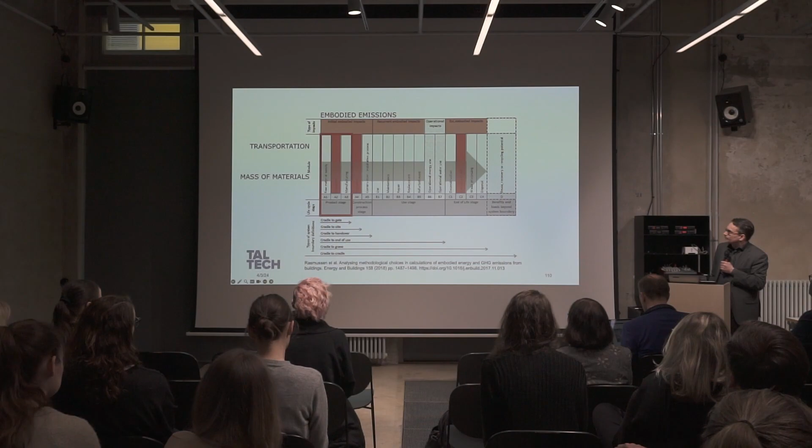So what can it say and what can it tell us? This is often asked in education, by our students, and in training sessions. To some extent, the carbon footprint of a building can tell us about site conditions. As we heard from Alvin's presentation, if the soil needs high foundation, if it needs stabilization, this is a difficult place to build, you will get a high carbon footprint.

It can reflect the use of local materials and low-tech materials, if you like. This is not excluded. We have two layers here: the LCA method described by the graph, and the layer of regulatory default values. With the good aim, the regulatory layer aims at having comparable results, but sometimes it also simplifies things and leaves certain things out. For example, the Finnish discussion was a lot about what to do with underground spaces. We know there's concrete, there might be a lot of construction underground. But if we take them in, two buildings become very difficult to compare, because one might have a lot of stories underground and another one doesn't. This is a regulatory layer—we want to compare, so we have to exclude something to be able to compare. But if you just want to know, you of course include everything for the sake of knowing, and then you can improve your processes and way of working.

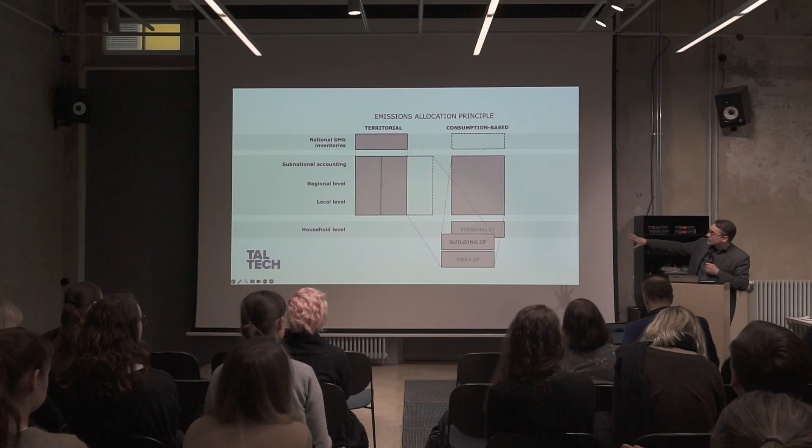This is simply because globally the methods are still developing, and there is no consensus on how to estimate emissions for cities. There are two pathways we are looking into in our research team: consumption-based and territorial. Now the building method is actually leaning more towards the consumption-based method, and this causes some methodological difficulties that I don't have time to discuss right now.

The difference between the methods is that the carbon footprint of a building sees the process from raw material extraction until end of life as a linear process in time, whereas city inventories look at one year—what just happened—and try to quantify that. That's why they are not directly comparable.

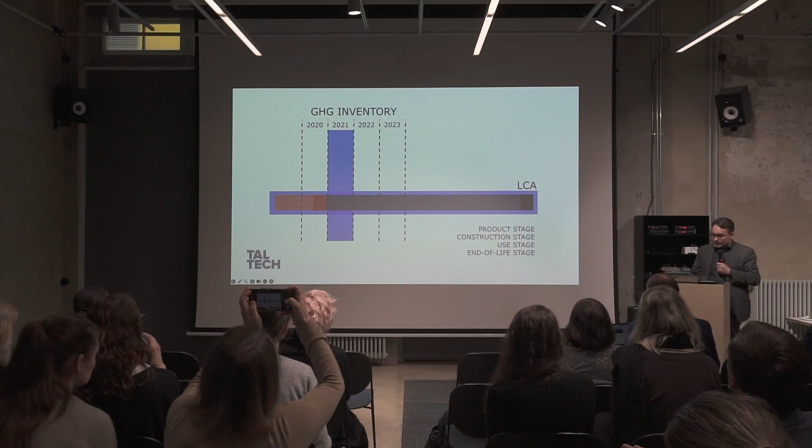A slice of the building's life is included in city and national inventories like this, usually just the energy. And now the question: why are we using 50 years as a lifespan in this building carbon footprint calculation? Isn't that too little?

I'm often asked, buildings should last much longer—look at the buildings in the Old Town. Why are you saying it has to be 50 years? Well, the building won't collapse after 50 years because of our calculation method.

This is the regulatory layer, because we want to compare. The point of view for this calculation is the moment when we know something about the materials, but we don't know how long this building will last. Maybe there will be a new master plan that says this has to be demolished after 5 years. We don't know—it's speculative.

Future is speculative, but to be able to compare and set some limit values, we just assume, let's say, 50 years. Why not more? It would be nice to have buildings that last 500 years. Because then the results would be entirely dominated by the energy use, and the materials would be just a tiny slice in the result that would make no difference at all.

So with the 50-year lifespan, we have a rather good balance between materials and energy use. Specifically in Estonia, this is dominated by energy use. If you go to Sweden, the results are totally different. In Iceland or Norway, the energy share is very small, mainly because the grid electricity is so low carbon there.

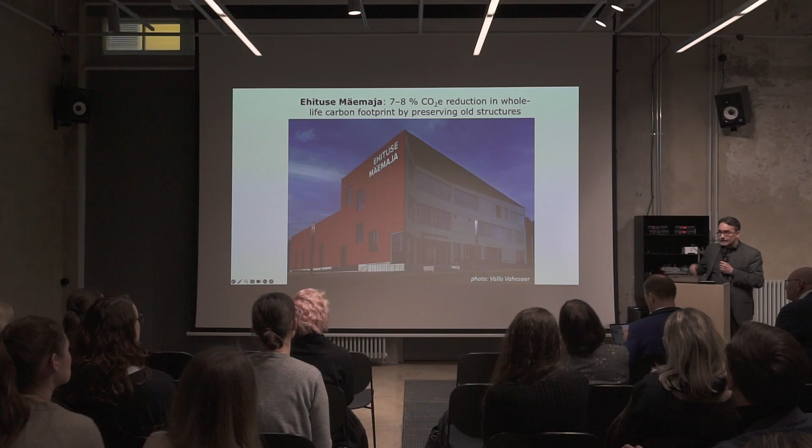Then there's the reuse of materials. Reused materials come in without emissions, and there's a real benefit. This is one example we calculated for a project with Kadrian. This building had a test hall, foundation, and underground floor that was kept. We estimated that 7 to 8%, using the old emission factors, was saved because we were able to use the old structures.

I think our professional activity will be more and more characterized by this kind of work. For example, at Aalto University, the main design studio for second year students was changed a couple of years ago - now it's an adaptive reuse studio, whereas it used to be a building technology studio. That reflects the change in our work. We are more and more reprogramming buildings, reusing materials, trying to increase the value of material that was once considered waste and worthless.

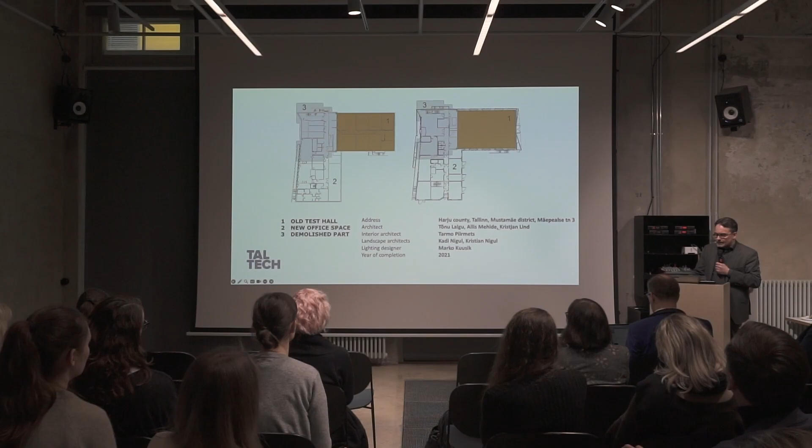What else can we do with low carbon architecture than show good results in carbon footprint? If I tell you that this is just one tool and it cannot do everything, what are the other tools that we have in architecture?

The impacts on city scale won't show, but they are many. The economic use of buildings - we can encourage it, we can make it easier. We can invest in adaptability, as Alvin was referring to. Because over a long period of time, if a building is strictly designed for one purpose, and needs keep changing, that means more renovations, more material investments. In the worst case, it means the building will be demolished.

So if you look at future architecture, maybe buildings will look less like specific buildings for one use. They become more generic in a way. They can still have strong identity and character in architecture, but they aren't bound to one use - rather they're flexible, from offices to apartments and back, and they serve a longer time.

Low carbon lifestyle is something that doesn't show in carbon footprint metrics, but it's something we as architects can encourage. If you think about urban farming, there's no way to make it visible in carbon footprint, but that doesn't mean it's a bad thing or that you should ignore it.

One important thing that doesn't show in carbon footprint is how many square meters we have per person. Imagine a very rich person building himself a house of 1,000 square meters and living there happily. Then we have a 1,000 square meter townhouse that houses 20 families. If the unit is CO2 kilograms per square meter, we cannot see the difference. But of course this makes all the difference globally.

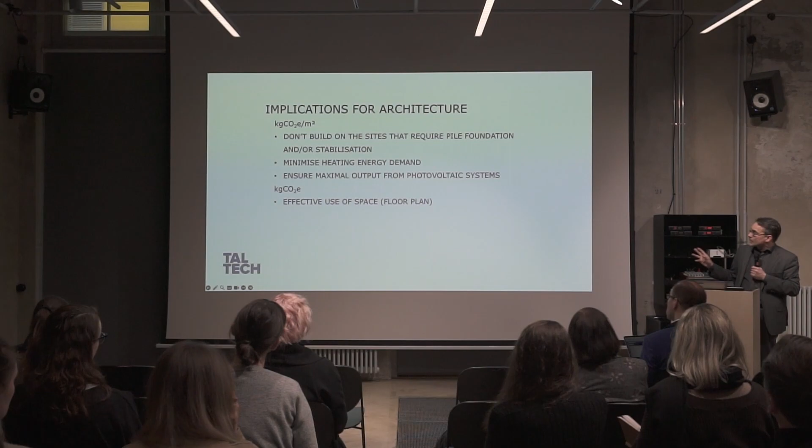Then if you look at the total emissions, these were per square meter emissions. The effective use of space is important for us, and I will come back to this later, and skip the next one, and go to the question of material choice.

There was an interesting debate here about CLT versus concrete. I believe totally that the results we have in our database are correct, and the embodied emissions are not like God-given things. They are the process of the industry.

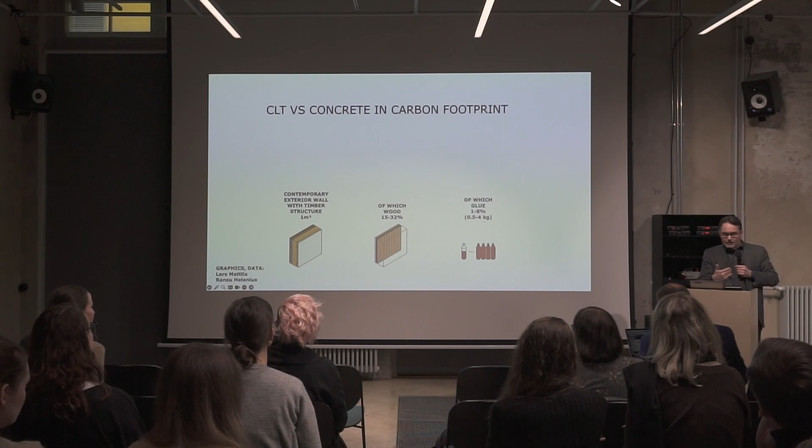And now it just happens that the process of the Estonian wood industry is not very good. If you burn diesel to dry the timber, results are really bad.

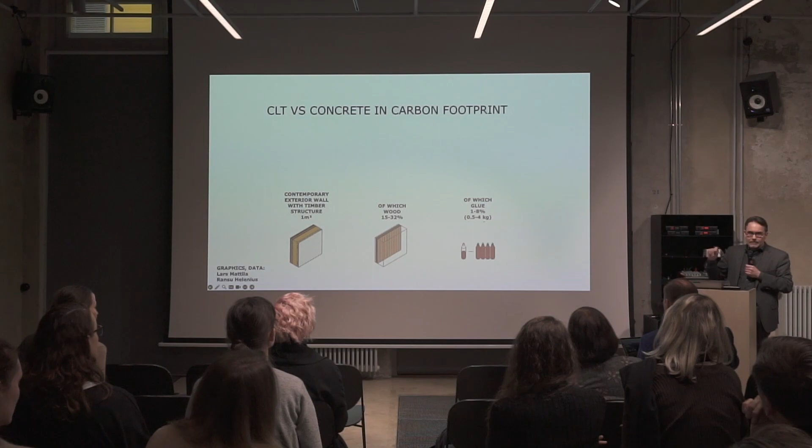But also, another finding by Lars Mattila and Ransu Helenius is that actually a rather small percentage of our wooden buildings are of wood. The share of timber is actually very small. So if you expect that using timber makes a radical reduction, actually the share of timber is rather small. And how could it make a really radical impact if the percentage of timber in timber houses is so small?

How could we respond to this? We could design houses that are more of wood, less of gypsum, less of glue, more of timber.

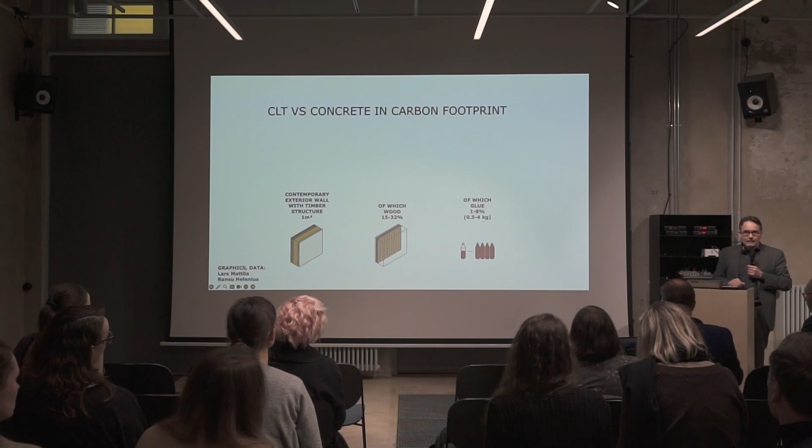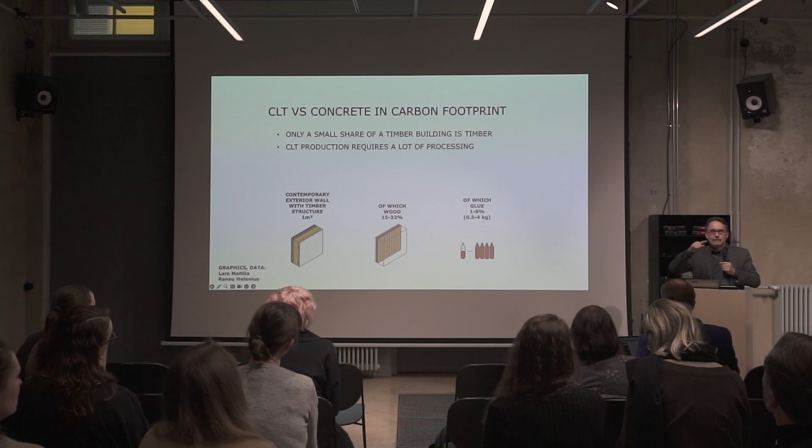And CLT production especially requires a lot of processing. We first split the trunk into small pieces, then we glue it back again on the panels. And then an architect comes and says we need big holes here because I like big windows. That means a lot of waste.

A good recipe for a CLT building would be that you go to the factory, see what size they produce, and use it entirely in your building. And when you have windows, you have full wall windows, and maybe some light frames around it if you put thermal insulation. Then you don't waste the material, you understand the process behind it, and a certain kind of CLT architecture starts to evolve that uses this understanding of how the material was created.

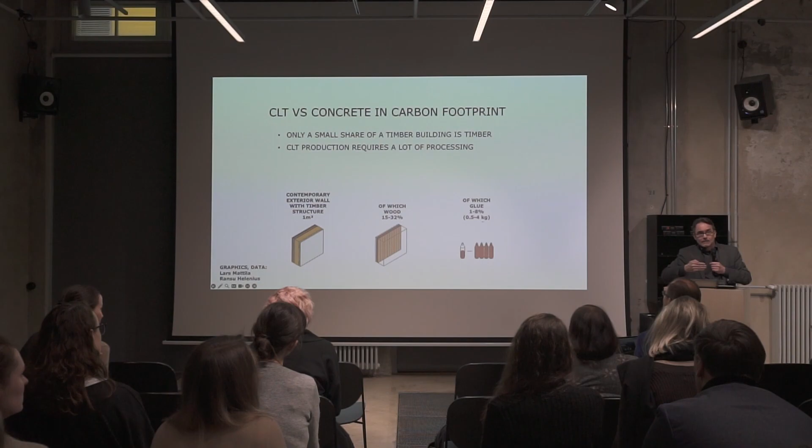Okay, so here we come to the next point. What are the expected impacts? Firstly, it's good to know, because this knowledge is different in all these countries. So the weighting of these components is different in Norway, Denmark, Sweden, and Finland. It's good to know what it is here.

Then, of course, we can prioritize low carbon construction materials as architects, but I believe the main impact will actually happen when the industry notices that, wait a minute, we would like to export to Nordic countries, and our numbers look like this. Who will buy our timber if we have such poor values? Will we lose the tendering processes if we come in with this kind of EPD? Probably yes, so they will improve the process, and that is exactly what we would like to have.

What kind of buildings then would we not like to see? This is a question that the Finnish Ministry of the Environment didn't like at all. I was asking, what are the buildings that you would like to cut off with the regulation? They were saying, we don't want to cut anything off, we just want to steer. Of course you cut something off. What is the regulation that doesn't cut something off? What do you need it for?

Of course there has to be some compositions that you don't want to see. They are the worst ones. And I think we have to understand exactly what these are, because we want to steer the development so that we know exactly what we don't want to have anymore.

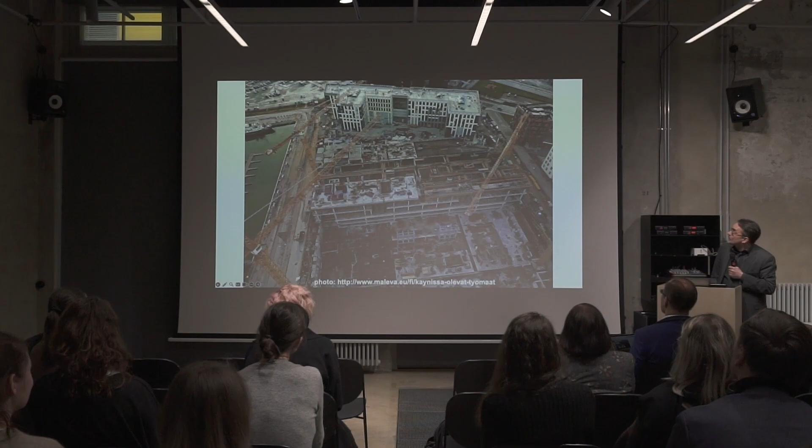And sorry to say, I've been using this image in many lectures to show what we don't want to have. Here, you know where we are. We are building of concrete, aluminium, steel, and glass—materials that are not renewable. We have buildings that are almost glass covered, exposing them to rather high heating energy demand. And with all these choices, we are accelerating climate change that will lead to sea level rise. And we have three stories underground, ready to suck the water in. So there's both a combination of greenhouse gas mitigation and adaptation neglected in this project.

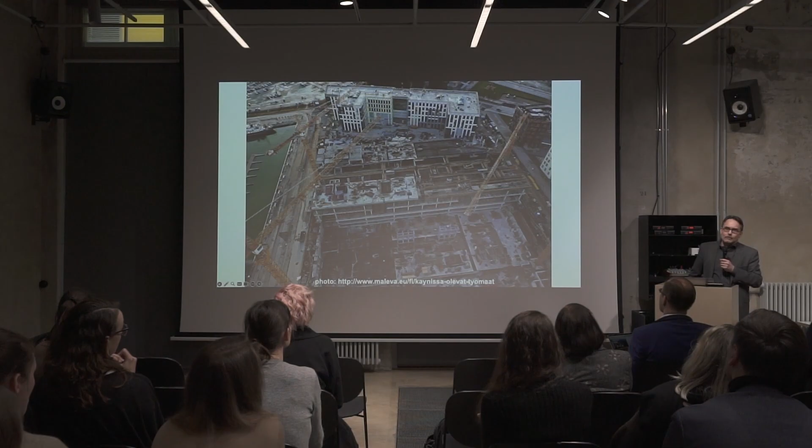So I would say that we need different solutions. And sorry to criticize, but this is the change we want to drive. And without the change, there's no sustainability. If you remember the commission given to the Brundtland Committee about sustainability—if the answer was sustainability, what was the question? The question was the global agenda for change. So if there's no change, there's no sustainability.

In expected impacts, we also have to keep in mind, especially in regulation, that if we set the limit value—it could be project-based, it could be set in a local detailed plan, it could be set in the climate law—it cuts something off. And we have to be very careful now, if the climate law is to be implemented already next year, that we are not unintentionally cutting something off.

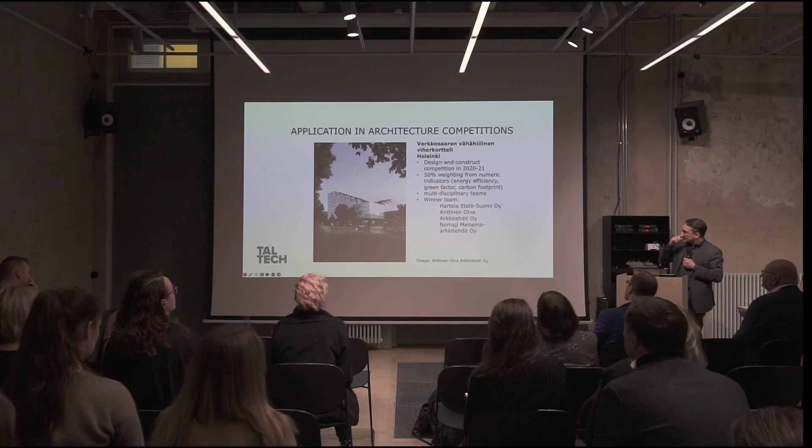One more section here before I close my presentation. It's an interesting question if we can apply these in architecture competitions. In Finland there's some kind of tradition of applying carbon footprint limit values in competitions. This was one of the recent ones where half of the jury work was based on quantitative metrics - 50% of the weighting came from green factor, carbon footprint and energy efficiency, and 50% from architectural quality.

And here we see a very fundamental problem, because if we try to wrap together quantitative metrics and architectural quality, the result would be really bad. It was pure luck that this team had both the lowest numbers and really excellent architectural quality. Imagine a situation where the building would be totally awful in architecture but show brilliant numbers in carbon footprint, energy efficiency and green factor, or vice versa. How do you do that then? This is something we want to avoid.

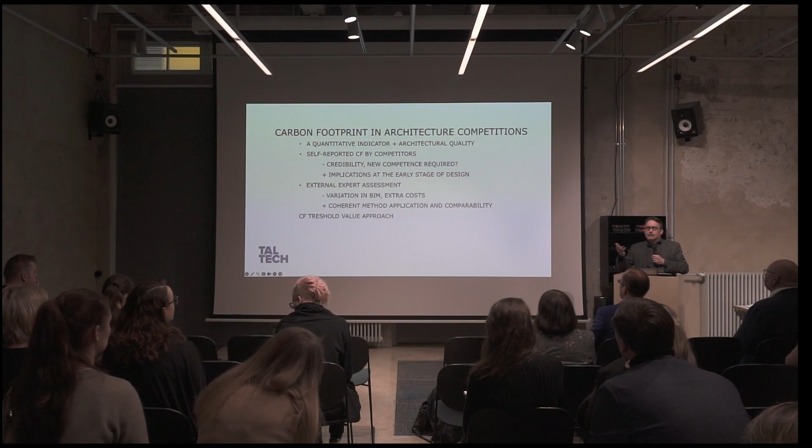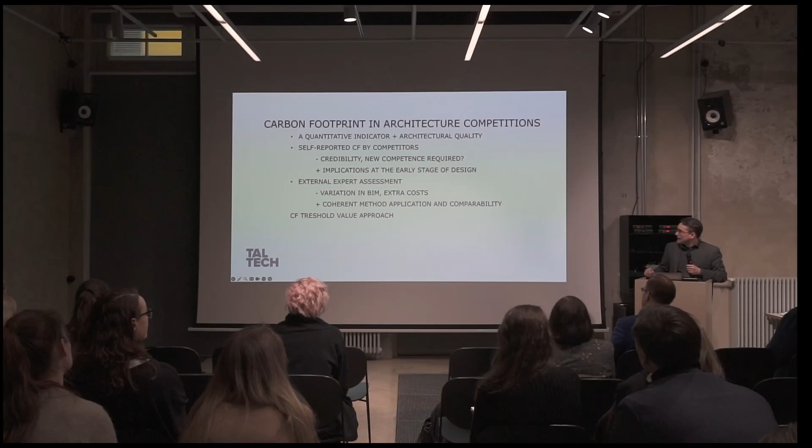One solution for that - these are some observations - could be that we apply a threshold value. So all competitors who submit an entry have to calculate the emissions and show they are under the limit, we are fine, and then you are evaluated for architectural quality, but we don't mix them. The problem is that when competitors do the calculation themselves, they might not always be quite credible, because you never know what floor area they were applying and so on. But the good thing is that it informs the process in time - if you do it in early stage, you also learn something from the calculation you can improve.

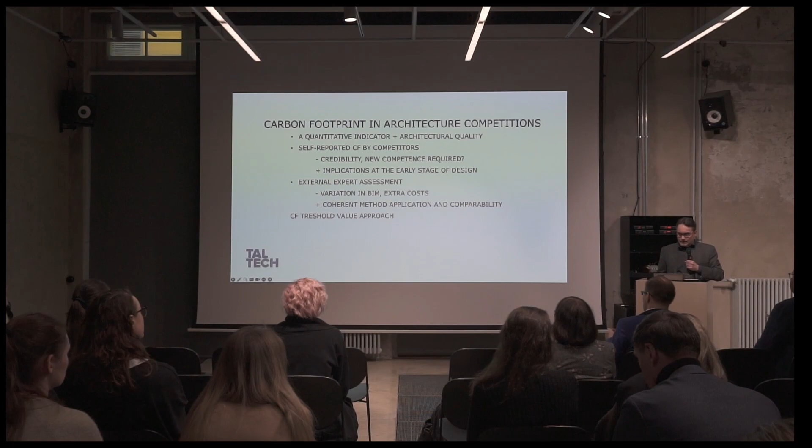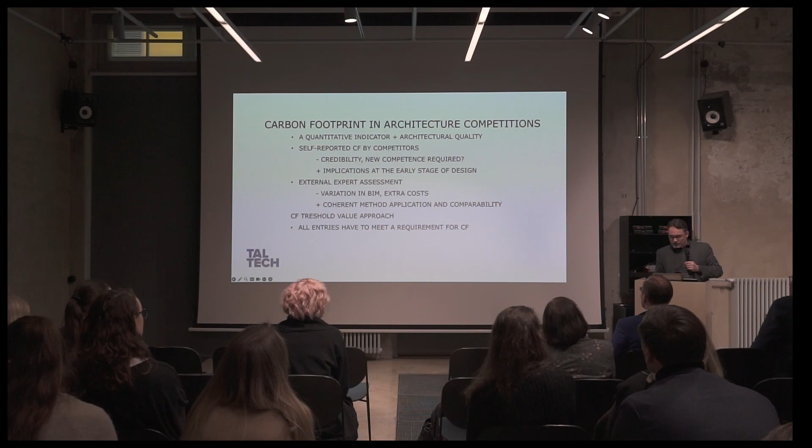And of course there's also an opportunity for expert assessment afterwards, but the variation in building information modeling usually makes this even more difficult for the experts. You would need design teams that have carbon experts. The previous competition was, by the way, done that way - each team needed to have a carbon footprint expert. So maybe a threshold value could be something to consider. And of course if there's a national limit value, that might be enough for many cases, but if a city like Tartu wants to be a forerunner with more ambitious climate goals, or if the future owner of the building wants something special, then this could be an issue.

They lost the concrete industry. The detail plan regulation remained, and today the City of Helsinki is applying a carbon footprint limit value in all their detailed plans. So if you want to design in Helsinki, you have to know how to calculate the carbon footprint.

And yes, we won the competition, which got me employed for four years. I will conclude with this.

The new perspective here: we've been working with energy efficiency before, but now the question of materials, efficient use of materials, reuse of materials, tracking, finding low-processed materials, natural materials, becomes a new issue and a new perspective. How to make these processes more simple, less energy consuming, less transportation - maybe the value of local materials, maybe the value of simple natural materials will be highlighted. It can be reflected with the method, if you like.